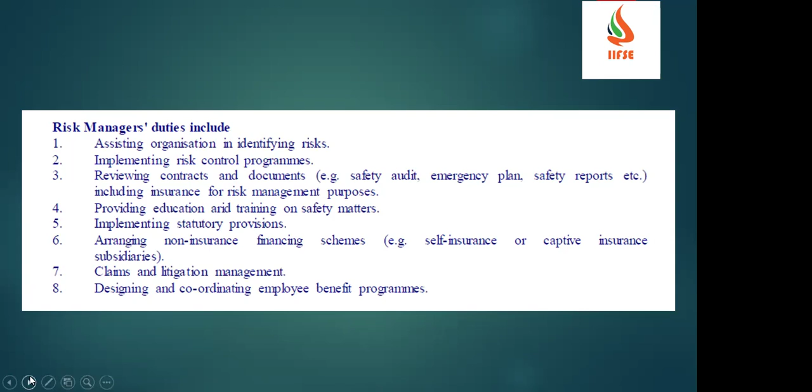Now we'll see another technique for hazard identification analysis: preliminary hazard analysis. This is an initial study to determine the hazard causes, effects, and controls, where the facts of the proposed product, process, or operations are known to determine the hazards. For example, for a product using electric power, the pre-assumed hazard is electric shock.

For example, if you are selling any product like a mobile or other electronic gadget that works on electric power, the primary pre-assumed hazards are shock, burns, fire, sparking, hot surfaces, inadvertent starts of the equipment, failure of the equipment to operate at a critical time causing an accident, radiation effects, electrical explosions, etc. Similarly, adverse effects of foreseeable causes will be chemical exposures, reactions, acceleration issues, mechanical effects, and pressure. These are the various kinds of hazards that will be there with your product.

This method is fast, cost-effective, and not as complicated as other hazard assessment methods. The first step in its basis is to assume the type of accident or hazard possible—here we are thinking about what kind of accident will happen, either fire, explosion, toxic release, or any other. Find out which plant, component, system, or machine can cause this accident. Here we are doing it in reverse: we assume what kind of accidents can happen, then find the causes or contributory causes, or the equipment or materials which will lead to these accidents, then find the event resulting in or initiating the hazard or accident.

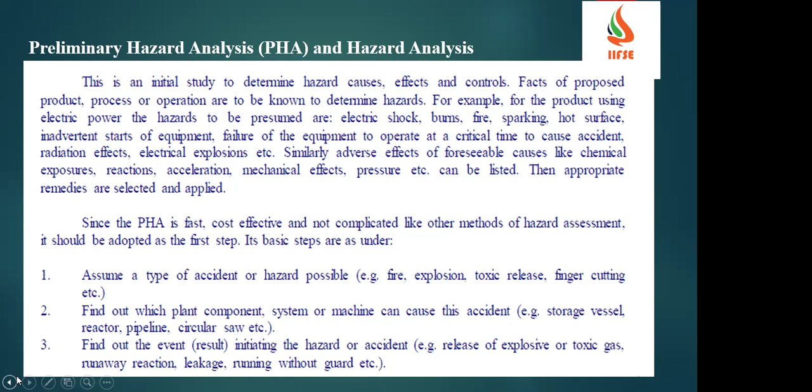So what will happen here is release of explosive or toxic materials, runaway reactions, leaking, or running without a guard—these are the causes for the incident or accident.

This will naturally suggest the corresponding safety devices, such as safety valves, rupture discs, or alarms. These are the various controls we can implement. Then the component systems can be further examined by analyzing for detailed failure and also how we can remove them.

Preliminary hazard identification requires different stages of a project. In R&D, we analyze the chemicals, reactions, and impurities. In pre-design, we do hazard indices and hazard studies. In design, we do process design checks and HAZOP, failure mode effect analysis. In commissioning, we do safety audits, mechanical commissioning tests, NDT, and emergency planning. In operation, we can do condition and corrosion monitoring. These are the various areas where we use this.

PHA, preliminary hazard analysis, is generally used for early identification of hazards. What we do here is identify the hazards very early, before they result in accidents.

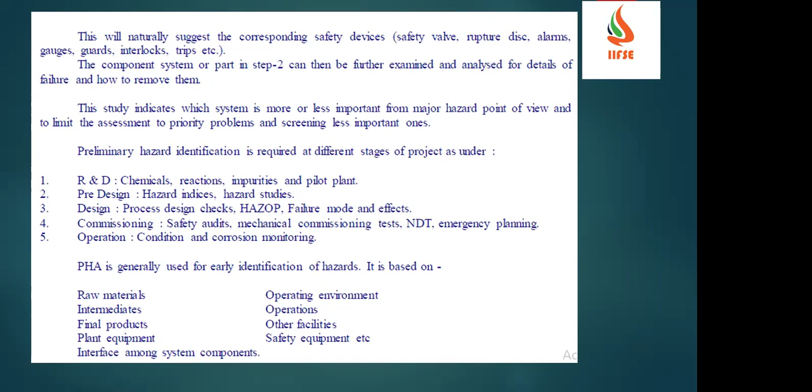Another one is failure mode effect analysis, or FMEA. This is also one way of assessing the failure rates of equipment. This procedure considers each component of the plant in turn, along with all possible failure modes, their rates, and their consequences. Here we will not consider human errors; we'll see only the component or equipment failures. The results are recorded in a standard format.

HAZOP study is the well-developed form of FMEA. So HAZOP came from the FMEA technique. By polishing FMEA, the HAZOP format came out of the process.

In this process, hazard identification considers all known failure modes of the components or features of the system in turn, and undesired outcomes are noted. Features of the system here mean the properties of the system, the nature of the system, or the working mechanism of the system. Those failures we will see here.

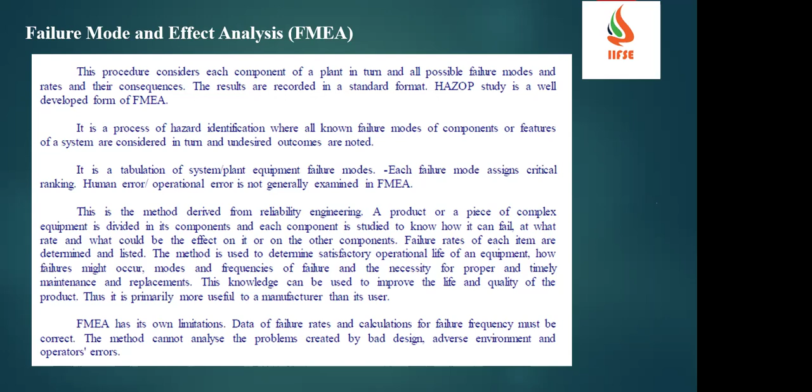So the failure frequency data is difficult to obtain. It is obtained from two types of testing of the component: performance test or reliability test.

The failure classification distinguishes between possible effects of the assumed failure. There are four parts of classification: safe, marginal, critical, and catastrophic, indicating increasing severity. So once this is done, they categorize the failure as failing safe, marginal, critical, or sometimes catastrophic.

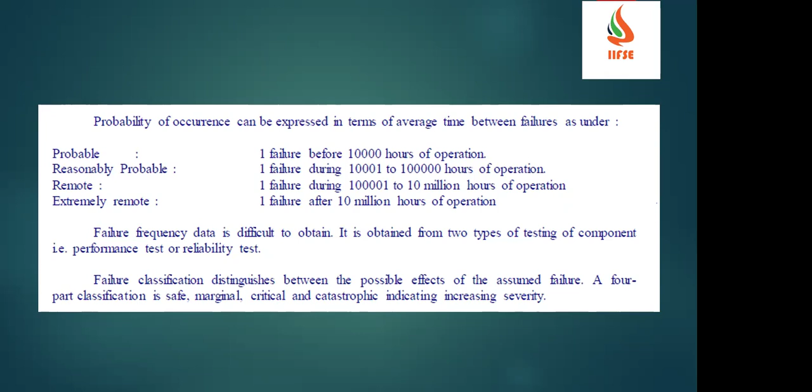Okay, that is about FMEA.

Then, the Hazard and Operability study. HAZOP is a multidisciplinary team that searches deviations from the design intent through a fixed set of guide words, checklists, or knowledge. So the first line itself you have to remember: it is a multidisciplinary team that searches for deviation from design intent. What do they search? They have a design. Then what do they do? They look for deviation from the design intent. What is deviated from the design? That they look into.

This HAZOP can be conducted to check the design and operating procedures for a new project or any existing one. It can also be conducted to improve safety of existing facilities. It is also useful before implementing significant modifications, or for other operational or legal reasons. After carrying out the preliminary hazard analysis, PHA, as explained earlier, on the plant component, systems, or machines.

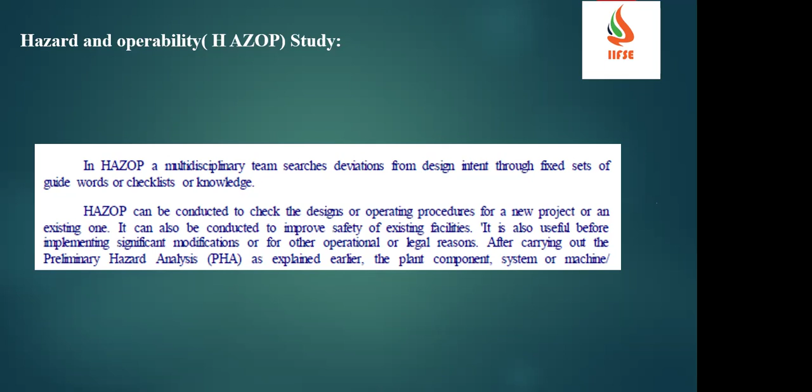So in hazard study, what we do is the equipment part which can cause a major hazard becomes known to us. Once you have done this, we identify the equipment parts contributing to major incidents, and find out the deviations or malfunctions leading to such events, and its mode of operation.

Once you know the effects, now we have to look for how it can go wrong. What are the reasons or causes? It will deviate from the design intent.

For example, when I'm doing a reaction, my reaction temperature should not exceed 50 degrees centigrade, but it is going beyond 80, 90, sometimes 100. So how can it go wrong? How can it go up to 100?

Either instead of giving steam, hot oil or hot water would have been applied to the chamber, or the jacket. Or sometimes my cooling system fails. Or the operator is not starting the cycle properly. Once the reaction is completed, before the exothermic reaction takes over, he has to stop supplying the steam or utility. He is not doing that. Then it goes into an exothermic reaction, resulting in the temperature going up.

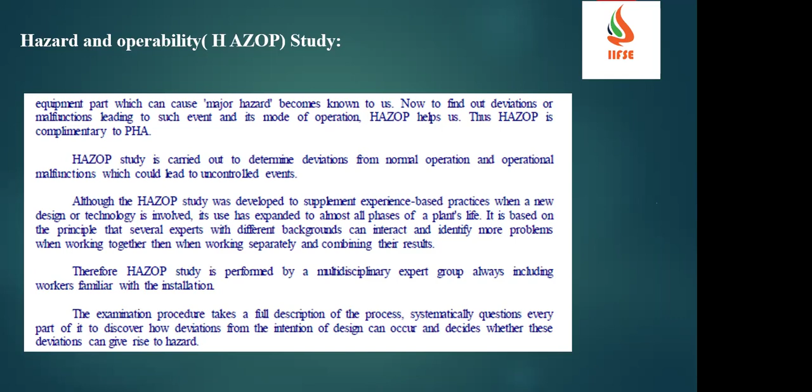What can lead to deviation of the design intent. And the examination procedure takes a full description of the process and systematically questions every part of it, to discover how deviations from the design intention can occur, and also decides whether these deviations can give rise to hazard or not. So based on that, they will take a process flow chart, then they divide each step, then they can question by brainstorming what can go wrong in this process. Then they will identify the root cause and they will take the proper control measures.

So each part of this design is analyzed with the questions formulated around a number of guide words, which ensure the questions put test the integrity of each part of the design, and explore every conceivable way in which the design could deviate from the design intention, and then each deviation is considered for what consequences it can lead to.

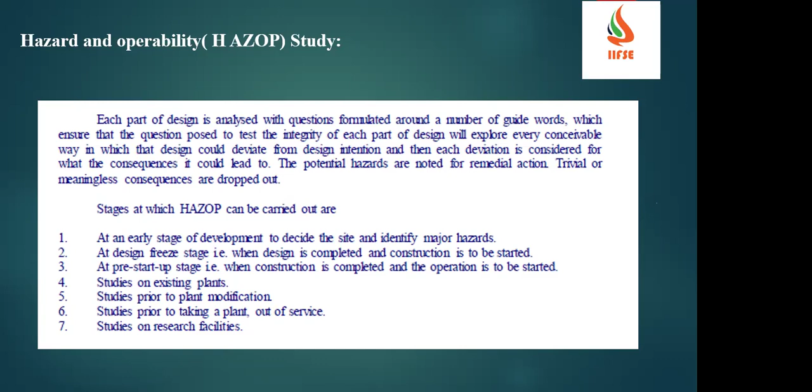If you see the stages, the HAZOP study can be carried out in many ways. At the early stage of the development of the project; at the design freeze stage, once you have done your design and you are about to freeze it, in that stage also you can do it. At the pre-startup stage also you can do it. And studies on existing plants, as I mentioned, in the working plant also you can do it. Studies prior to plant modifications, before doing modifications also you can do it. And studies prior to taking a plant out of service. Then studies on research facilities. In all these areas you can do the HAZOP study implementation.

If you see the procedure by which this HAZOP study will be carried out: define the objective and the scope. So why we are doing it, how we are doing it, what is the necessity, and also the scope, whether you are doing it for only one process line or for your complete manufacturing process. Then select the team. So once you have defined the scope, you select the team. Then prepare for the study, then carry out the examination, follow up, and also record the results.

So they'll prepare for the study. How do they prepare for the study? They'll get all the drawings and all the process parameters. Then they will do the examination based on the data which they have received. Then they'll take the follow-up actions based on the deviations identified and also the actions which they have addressed against the deviations.

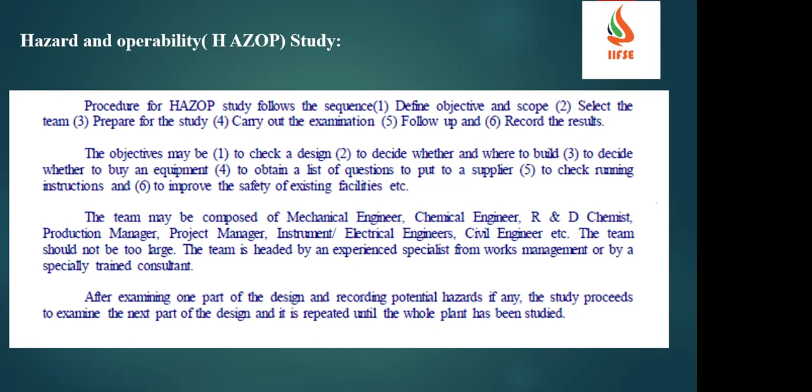Yes, the guide words. We have seen them two times in the previous slides. What are the guide words? These are the 7 guide words, which are very key and important. Even in the examination, they may ask what is meant by HAZOP and to write down the guide words with an example of each guide word.

So please remember, not or no. It is about the complete negation of these intentions. For example, the flow has to happen. Here they're talking about no flow or not flowing, no flow at all. But my design intention is the flow should happen. No part of the intention is achieved, but nothing else happens.

Then more or less, a quantitative increase or decrease. What will happen? My intention is only 3 liters of chemical should pass through my meter at one go. But here, sometimes it is going 4 liters, sometimes only 1 liter. These refer to quantities plus properties such as flow rates and temperatures, as well as activities like heat and react.

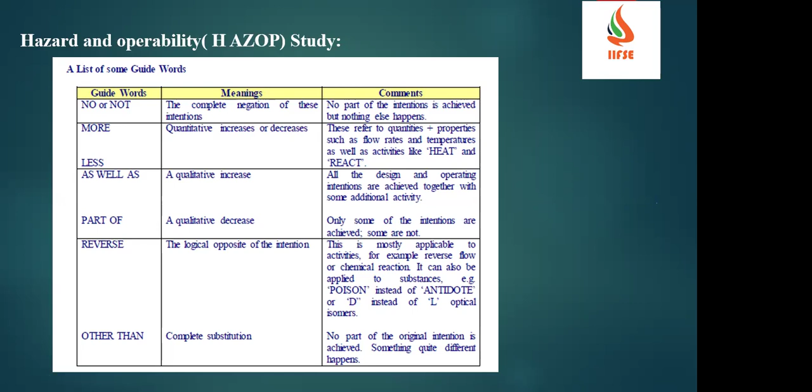Then other than, complete substitution. Other than means I have 3 chemicals, chemical A, chemical B, and chemical C. As per my intention, chemical B has to come first, but chemical A is coming first into the reactor. Instead of this, something else is coming. Or apart from chemicals A, B, C, chemical D is coming, which is nowhere part of my reaction process. Okay.

This is the step-by-step process of doing HAZOP. For example, here we are selecting a vessel. I'll just increase the font so that you can see it properly. Select the vessel, like a reactor or ANFD or centrifuge, whatever the vessel, and explain the general intention of the vessel and its lines. Then we'll select the line, like any specific pipeline, and explain the intention of the line, why this line is for, and apply the first guide word.

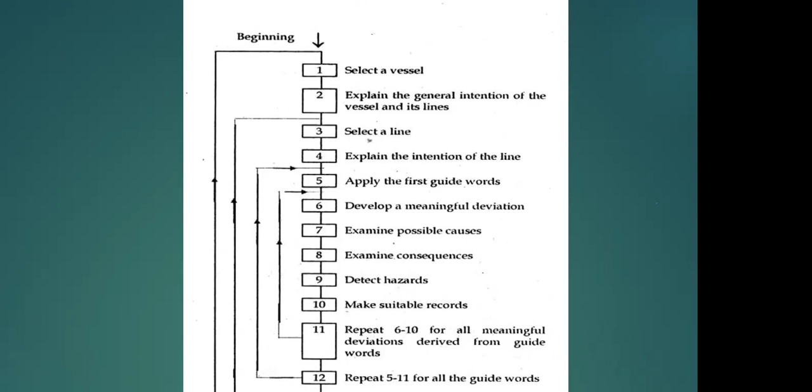So for each line, we will apply all the guide words: not, more, less, part of, as well as, other than. All these guide words are applied to each line to develop meaningful deviations, how they can happen, and examine the possible causes. Then we'll identify the consequences, detect the hazards, and make suitable records. Then we'll repeat 6 to 10 for all meaningful deviations from the guide words.

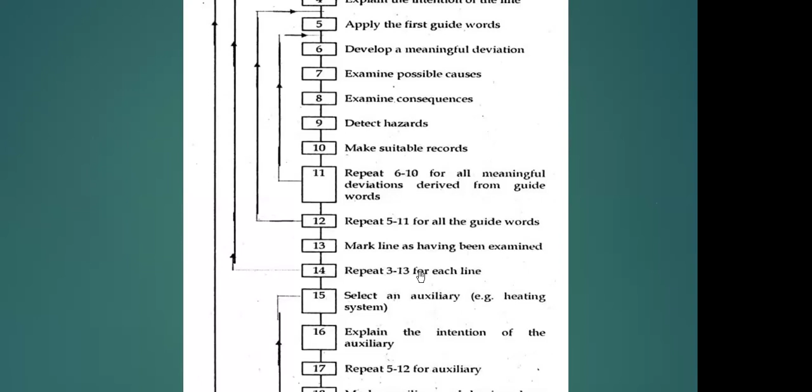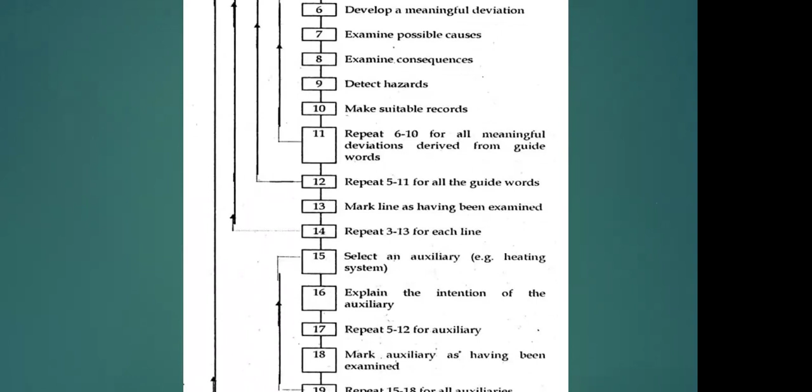Okay. Then repeat 5 to 11 for all the guide words. Then mark the line as having been examined. Then repeat 3 to 13 for each line. Then select any auxiliary or heating systems and explain the intention of the auxiliary lines. Then repeat 5 to 12 for the auxiliary line. Then mark the auxiliary as being examined.

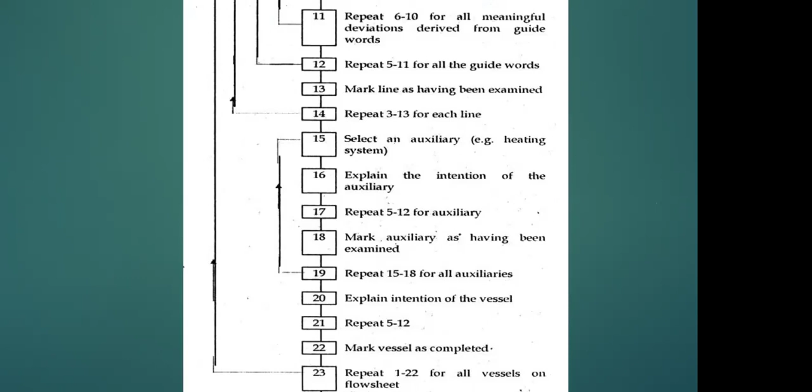So if you take a process, based on the completion of applying the guide words, you have to keep it marked as complete. Otherwise, you'll keep on doing the same. Once you have done all this, mark the vessel as completed and repeat 1 to 22 for all the vessels on your flow sheet. It is nothing but your process sheet.

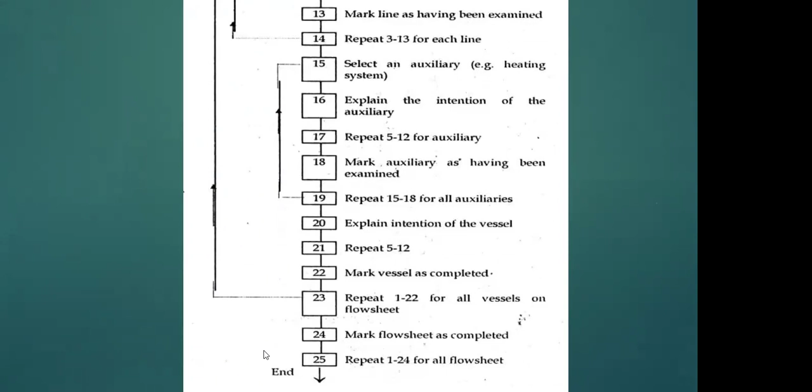Now we'll see ETA, event tree analysis. This is also one of the techniques we use for the investigation of accidents. Event tree analysis is a method to illustrate the intermediate and final outcomes which may arise after the occurrence of a selected initial event.

Selected initial event means the root cause of the incident, how it can lead to a major accident. For example, leakage of any gas or the generation of a spark. These are the initial events. How this spark can lead to catastrophic or major accidents.

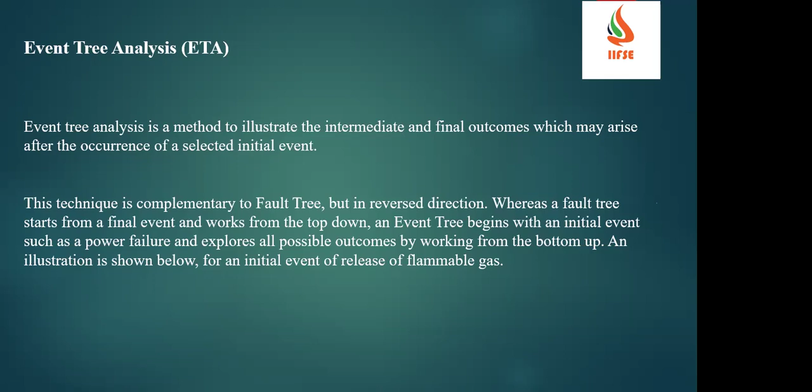This technique is complementary to fault tree, but in a reverse direction. So there are two techniques: event tree and fault tree. Whereas the fault tree starts from the final event and works with a top-down approach, the event tree begins with the initial event, such as power failure, and explores all the possible outcomes, working bottom-up. An illustration we can see now. These are the reverse cases.

If you see this event tree, here the release of flammable gas is an initial event. So what will happen on the release of any flammable gas? Either it results in a jet flame, if it ignites immediately; if no, it disperses into a cloud form. Then formation of combustible mixture, yes or no. If there is an ignition source present, it results in combustion of the vapor cloud.

If no ignition source, what will happen? It will disperse safely. Then, resulting from this combustion of vapor cloud, the blast effect. If there is a blast effect, it results in an unconfined vapor cloud explosion. If no, there will be a flash fire. This is how the event tree works. It is from the initial event to the final events, from the initial event to the final result of the event.

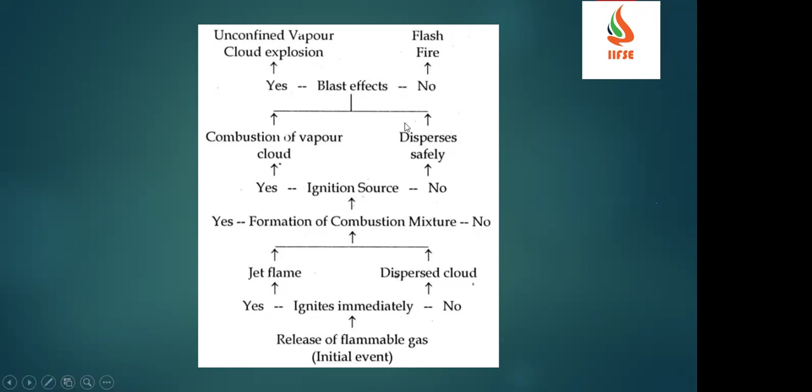Then fault tree analysis. It is exactly the reverse. There we have seen the initial event as a leakage of gas. In fault tree analysis, what will happen? We'll start from the top: unconfined vapor cloud explosion. Then we'll dig down. How has the unconfined vapor cloud explosion happened? Either there is a presence of a spark or there is a presence of vapor cloud formation.

Why has vapor cloud formation happened? Because of leakage. How has leakage happened? Because of a spillage or motor failure or any pipe failure, etc. So that is how we do the reverse method with fault tree.

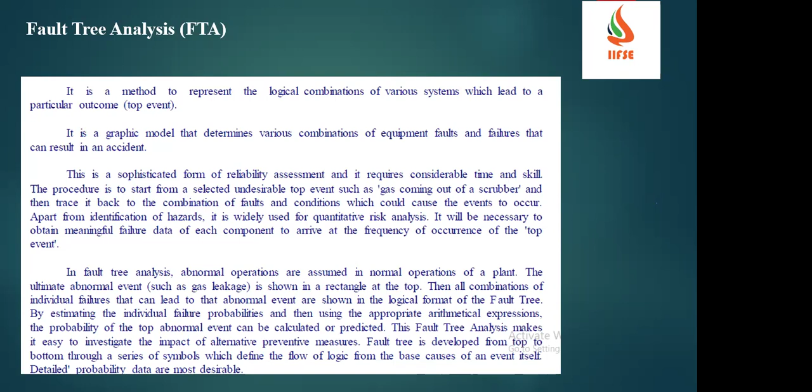So a fault tree, you can remember as చెట్టు నుంచి పైనుంచి పడటం, falling down from the tree. It is a method to represent the logical combination of various systems which leads to a particular outcome, which is a top event. It is a graphic model of the various combinations of equipment faults and failures that can result in accidents. You can see here an example to understand better.

Here the top event is possibility of fire. So the ignition source must be present and the mixture is flammable. So what can go wrong? Presence of a fuel, oxidizer present, mixture is flammable, ignition source. If all these things are there, then it will lead to this final event.

Then ignition source. What can be the ignition source? A lighted match or other open flames, electric arc or spark, or hot surface, and others. These are the possible ignition sources. This is how it will happen. Event tree will be from initial event to the top event. Fault tree will be from top event to digging out the initial events.

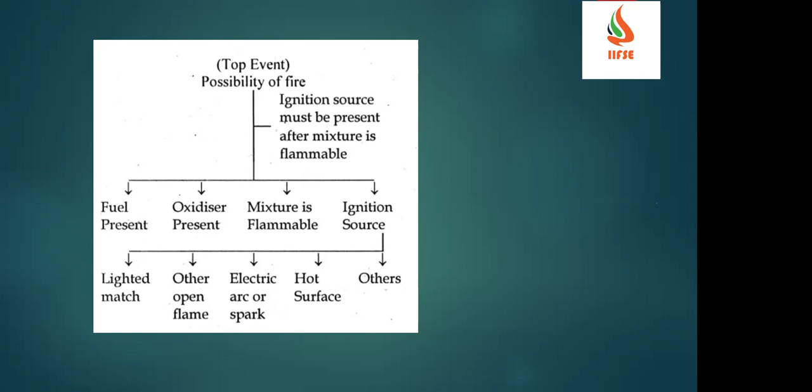With this, we have done this topic. If you have any questions, we can discuss. We have less than a minute. Today we have discussed hazard identification techniques, risk analysis, risk assessment, risk management, hazard and operability study. Then we have seen fault tree analysis, event tree analysis, and also PHA, preliminary hazard analysis.